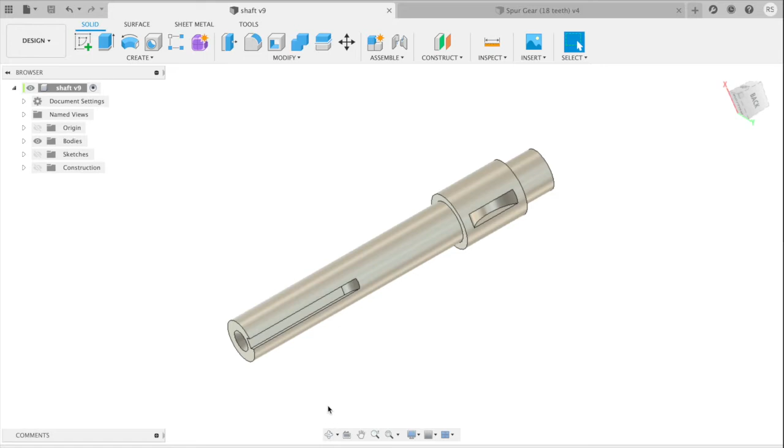Welcome back to the second part of the Multicam CNC router pinion shaft repair.

Today we'll be remaking the shaft and changing the keyways. Rather than using the roll pin, we'll go with a straight key and a woodruff key in the knurled portion.

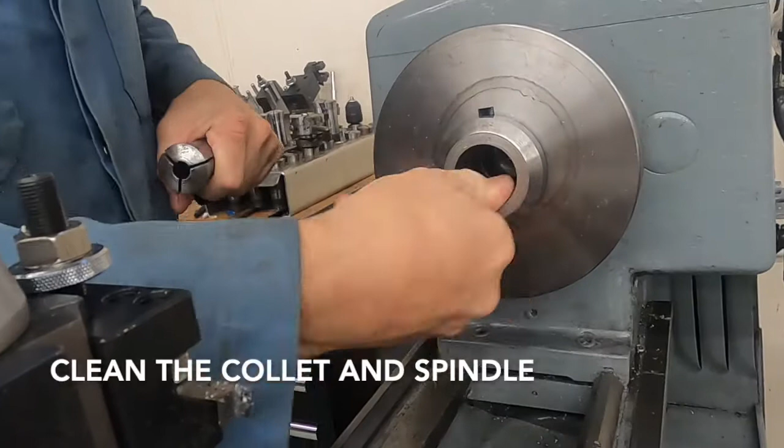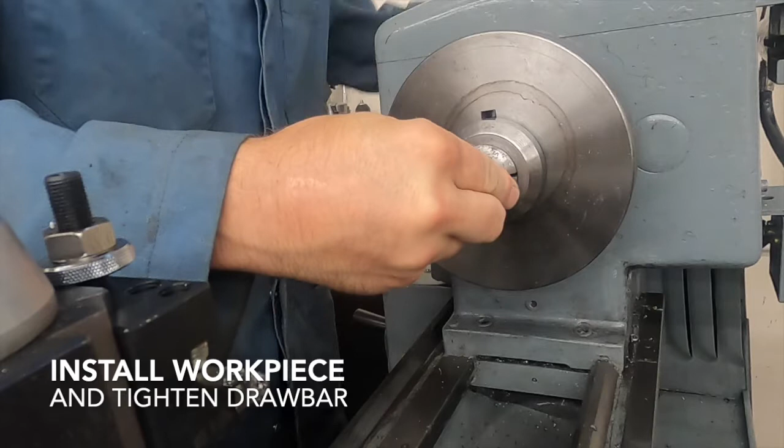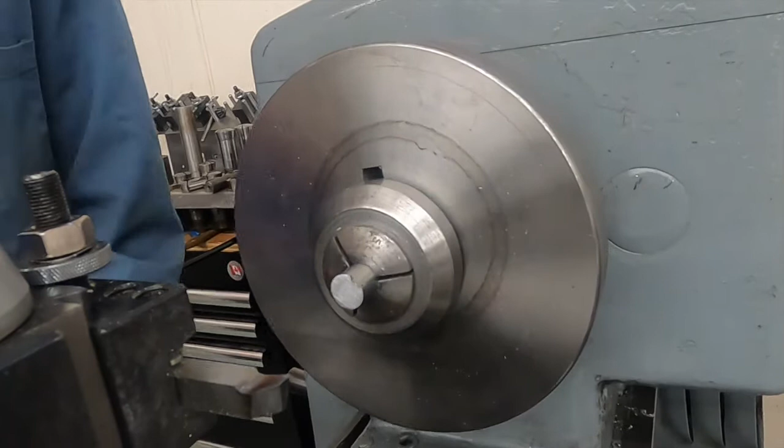The finished part will be 3 inches long, so I started with a slightly longer piece of 1/2 inch 17-4 stainless steel and installed it in a 1/2 inch collet on the manual lathe. Like most lathe operations, we'll start out by facing the stock in preparation to center drill it.

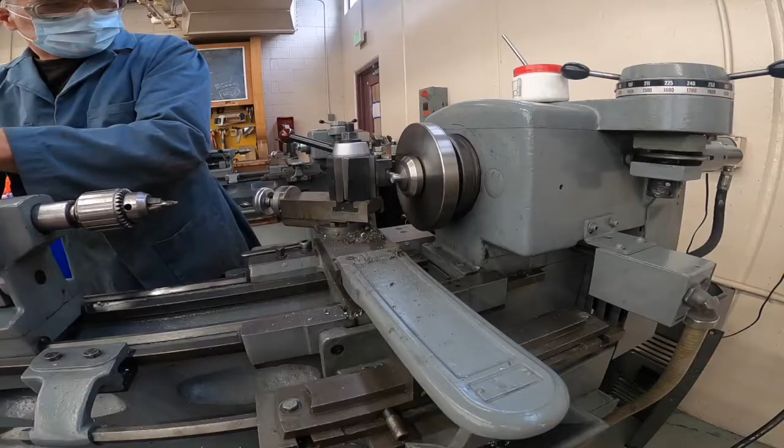This part will be held between centers for the grinding operation, so we'll need to drill a 60-degree center in each end. Here I am putting the first center into the part.

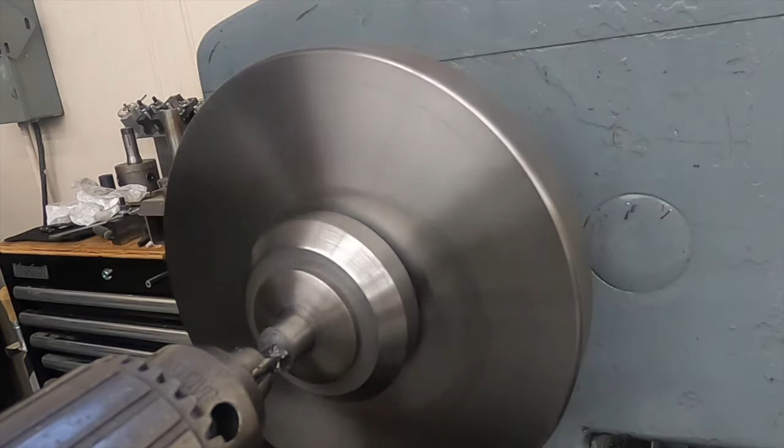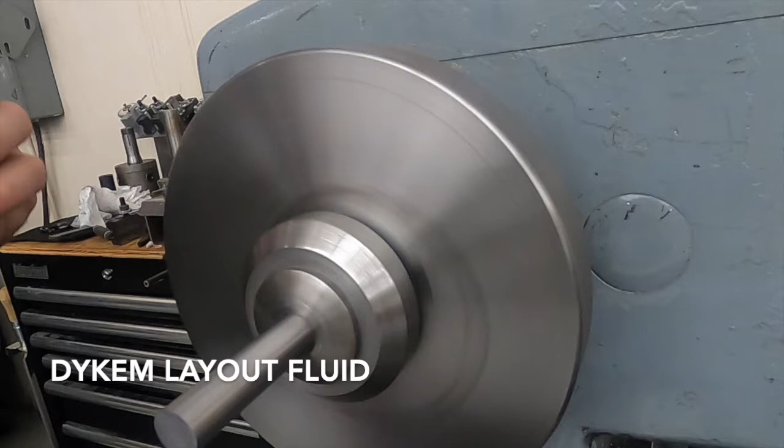Next, flip the part around and leave some material sticking out. This end will be coated with a thin coating of dykem, and this will allow us to scribe the final length so that we can face off this other end and get a good length.

Over on the surface plate, I've set the height gauge to 3 inches, and I'm scribing a line. I'm using a V-block to hold the part straight.

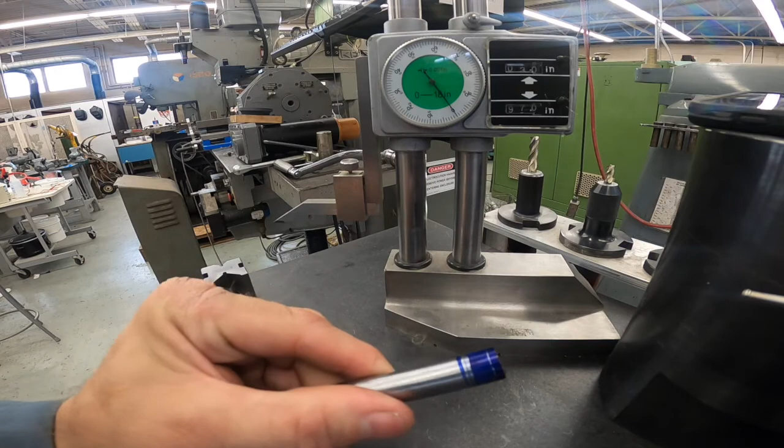Back over on the lathe, I'm going to remove the excess material, face it off to the line, and then I'll center drill it.

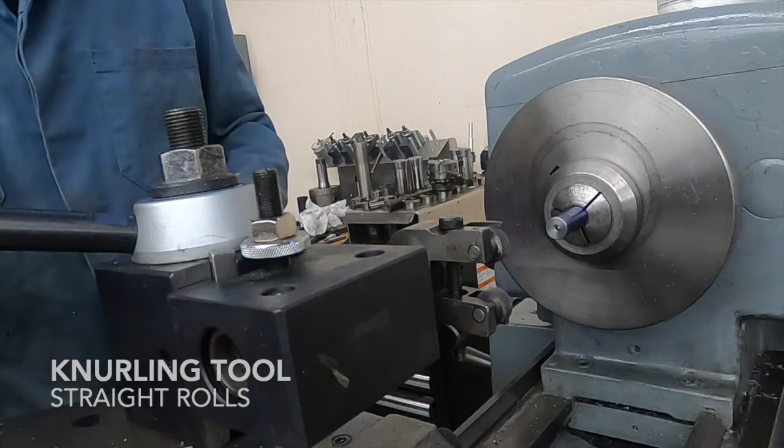Extend the stock about 1.5 inches in preparation for knurling. Even though the knurled portion is only about 5/8 of an inch, we're going to knurl the first 1.25 inches roughly. We'll over knurl it, and then we'll machine off the excess knurl.

By over knurling, this ensures that we have a clean knurled area where the knurls will be well formed, nice and sharp and clean. By knurling a larger area, we can get the knurl adjusted and make sure that everything is absolutely spot on perfect.

The knurling tool doesn't actually cut the knurls, but rather it forms them through plastic deformation. The pressure between the rolls causes the ductile material to change shape, forming the knurled shape, or in this case, the straight knurls.

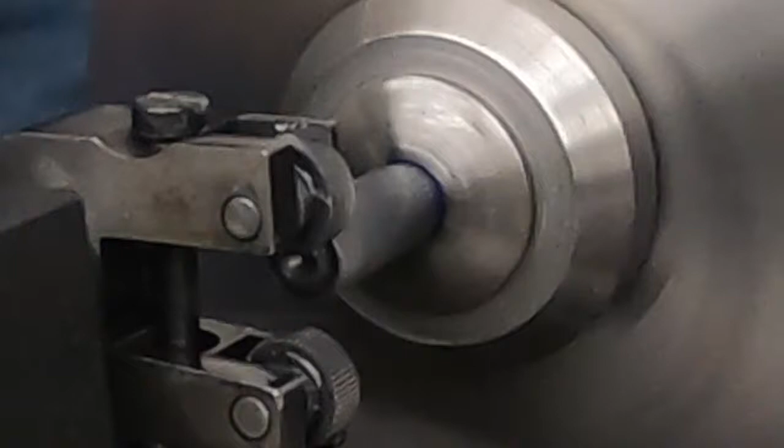Because of the extreme pressures exerted upon the material during the knurling process, an oil is used. Here, after cleaning off the oil, we get our first glimpse at the finished knurls, nice and sharp.

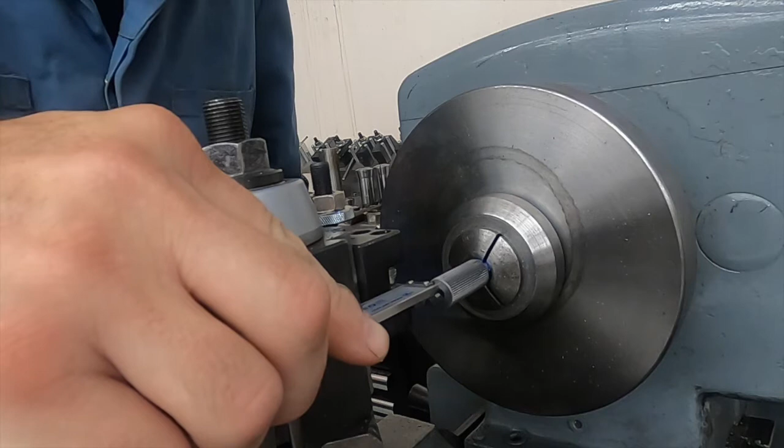Next, I'm going to use a straight grooving tool to cut the bearing shoulder. This does 2 things for me in the turning process. One, it provides a nice flat bearing surface, but two, it'll provide me with a reference so when I'm machining this end, I will know where to stop.

The grooving tool is like a cutoff tool or a parting tool. It just goes straight in and cuts a groove. Following that, we'll come and reduce this diameter down to 7/16.

The bar is then flipped around, and the collet is changed out for a 7/16 collet. All of these collets are 5C style, and they come in a variety of sizes, typically in 1/16 or 1/32 increments. Here we're going to hold the part up against the shoulder and support it with a tailstock for the turning of the main body.

I started roughing down the body and then decided that I should probably cut in my shoulder, and so I cut in the shoulder and then finished off the main roughing operation.

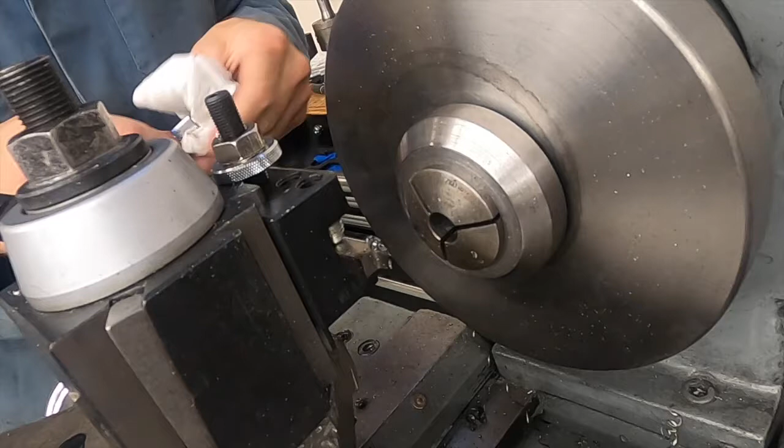As I get closer to final dimension, I switch from calipers to a micrometer for better accuracy, and I finished the part.

I think 5 thousandths oversized. I wanted enough that after heat treat it could be ground. So here I am just finishing off the final end.

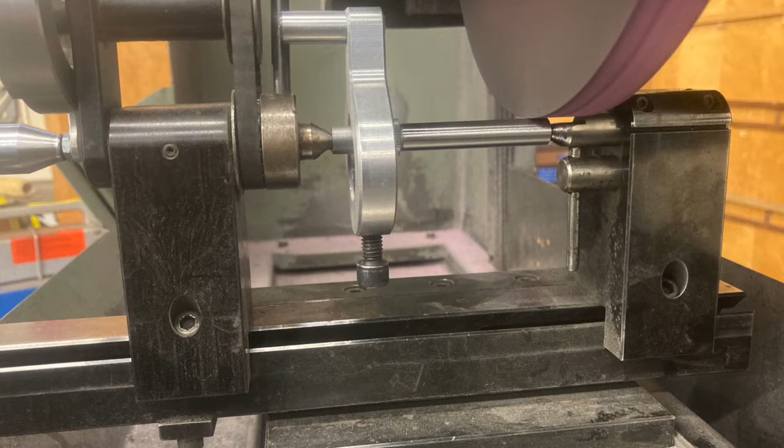Being oversized, it was a little bit snug in the collet, but it pulled out okay. After giving it a quick inspection, I took it over to the surface grinder and I cut that 5 thousandths down to 2.5 thousandths in preparation for cutting the keyway.

Cutting the keyway on this little shaft required a fixture, and so here's a quick design that will allow me to hold the part.

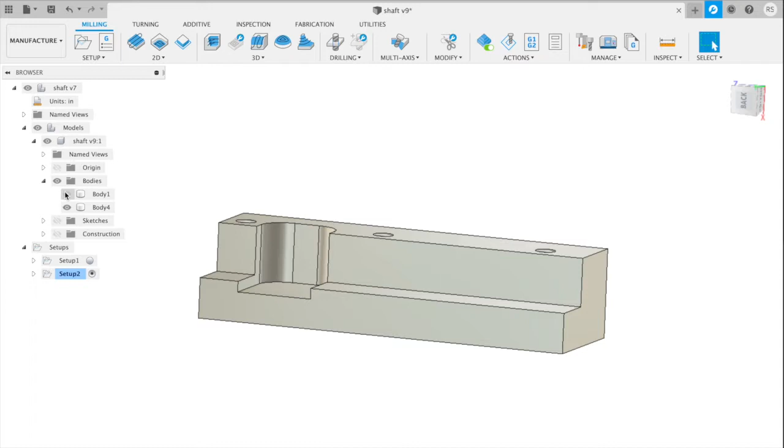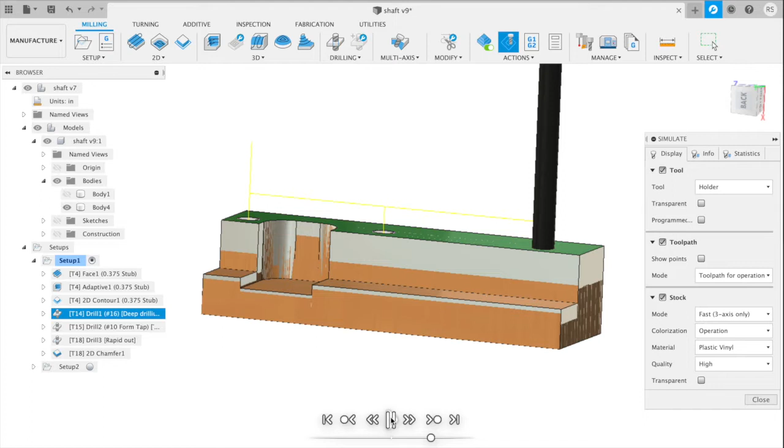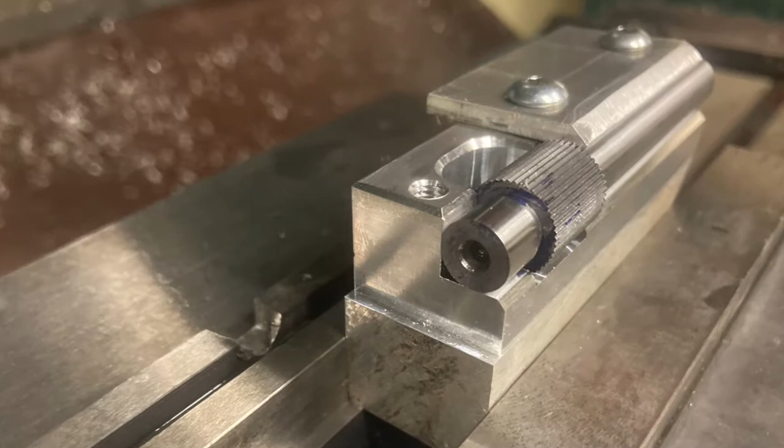The part will be machined out of just a piece of scrap. Here we are just facing off the part, followed by an adaptive clear, which is a roughing operation. Once the part is roughed down to the final dimension, it's contoured, drilled, and then tapped and chamfered. It doesn't take that long, but having a fixture like this makes it really easy to cut these features on this little teeny shaft.

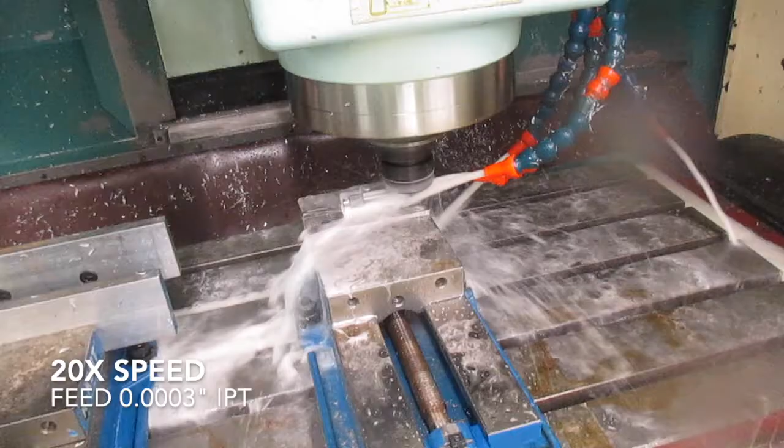The 1-inch straight key slot was cut with a 303 cutter, and the woodruff key was cut with a 404. A 303 is 3/32 by 3/8, and the 404 is 1/8 by 1/2.

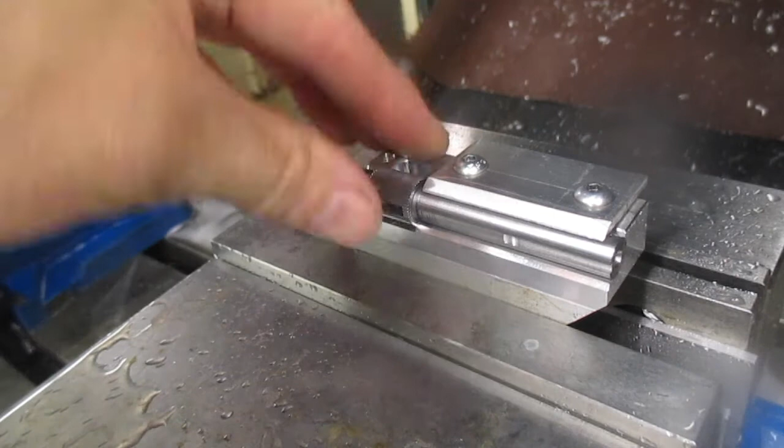Here's the finished shaft with the keys cut into it, ready to be heat treated. The fixture worked out great, and I'm very happy with it.

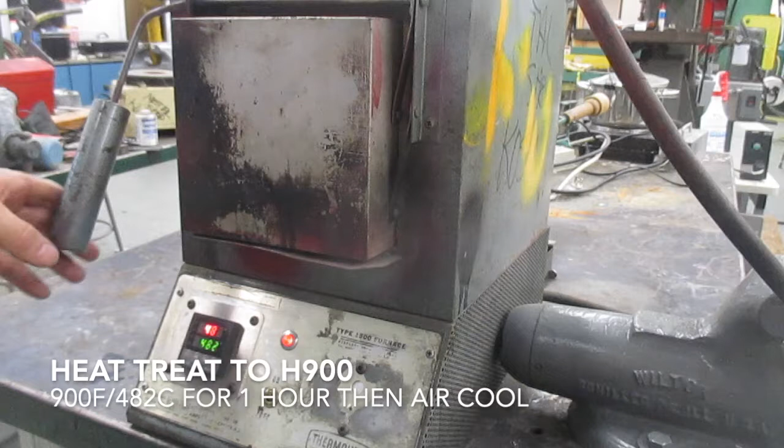This shaft was made from 17-4 pH stainless steel, and it heat treats at 900 degrees Fahrenheit or 480 degrees Celsius for 1 hour to what's called H900, its hardest state. It's then air-cooled to room temperature. When finished, it should have an oxide layer that's even and brown like this.

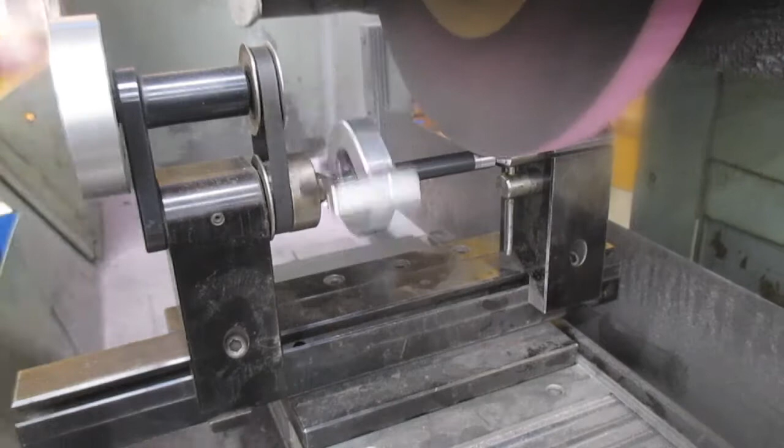Type 630 stainless steel, more commonly known as 17-4 pH, or simply 17-4, is a grade of martensitic precipitation hardened stainless steel. It contains approximately 15 to 17.5% chromium, 3 to 5% nickel, and 3 to 5% copper. The name comes from the chemical makeup, approximately 17% chromium and 4% nickel, thus 17-4 pH stainless steel.

Here I'm just finishing up the final grind of the part to its final dimension in preparation for reinstallation in the machine. You can see it turned out absolutely beautiful, wonderful.

I used the arbor press to press the shaft, knurled portion, and the woodruff key carefully into the pulley. Turned out great.

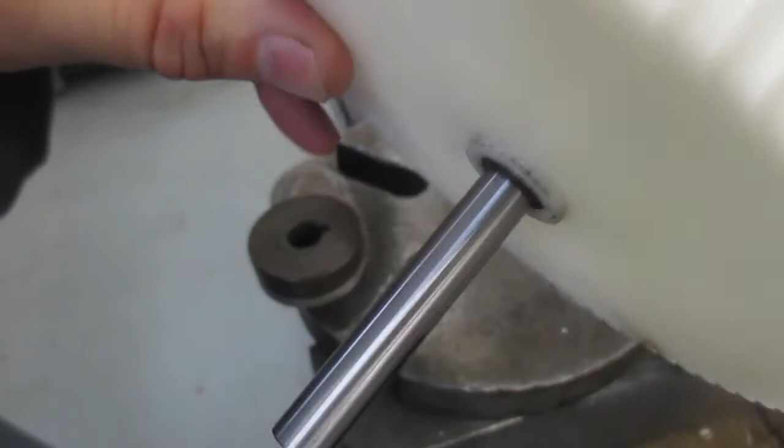I ordered an exact replacement of the original pinion and then decided to modify it with a straight key and 2 set screws 90 degrees apart.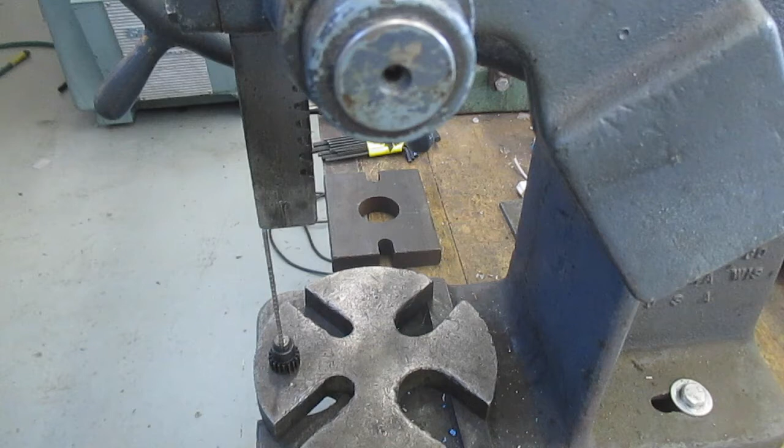It started by needing to broach the 3/32 key into the pinion. So here I am at the arbor press, getting it prepped in the bushing, and carefully getting it started. Broaching actually requires you to go pass through the part twice.

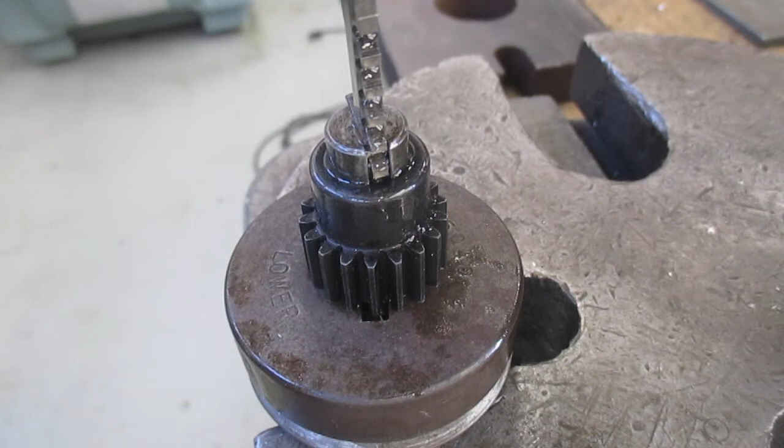On the second pass I would use a shim. I didn't record everything on the broaching process, but here it gives you an idea of what it looks like through the process.

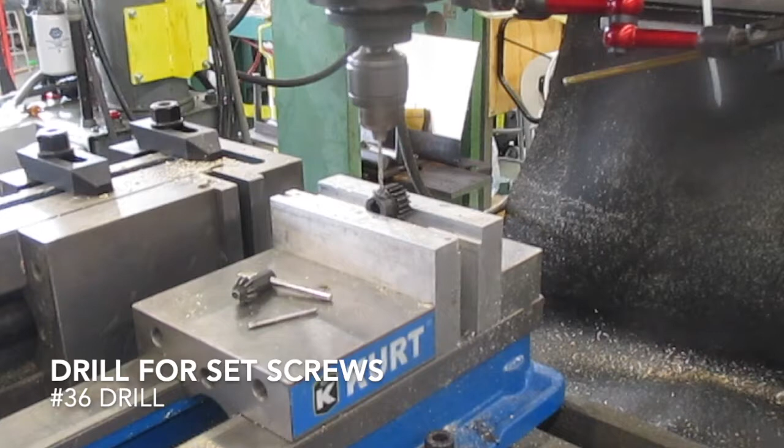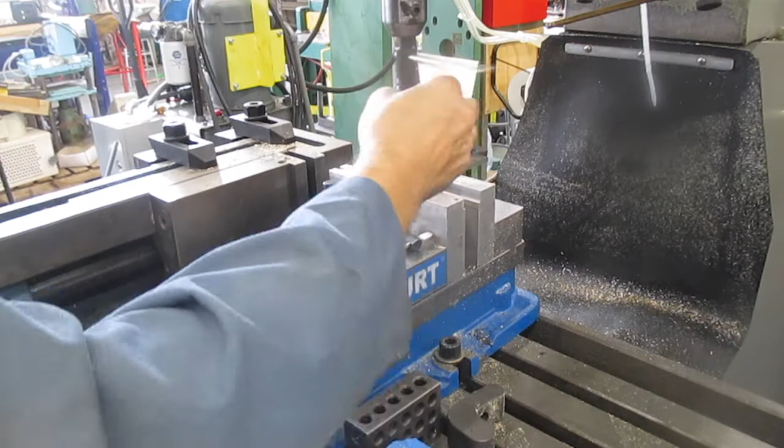The pinion was then drilled with a number 36 drill and tapped for the number 6-32 screw, done above the key and then also turned at 90 degrees.

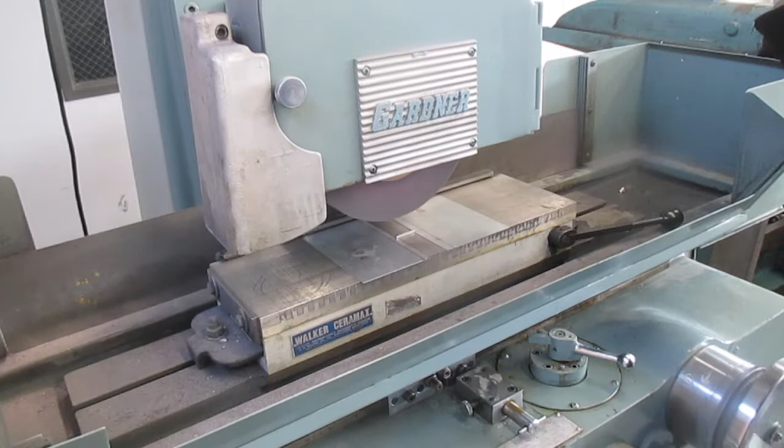I didn't have the key of the correct thickness on hand, so I simply took an oversized chunk of key stock and put it on the surface grinder and whittled it down to shape. I'm using the sheet metal to hold it in place. Didn't take very long.

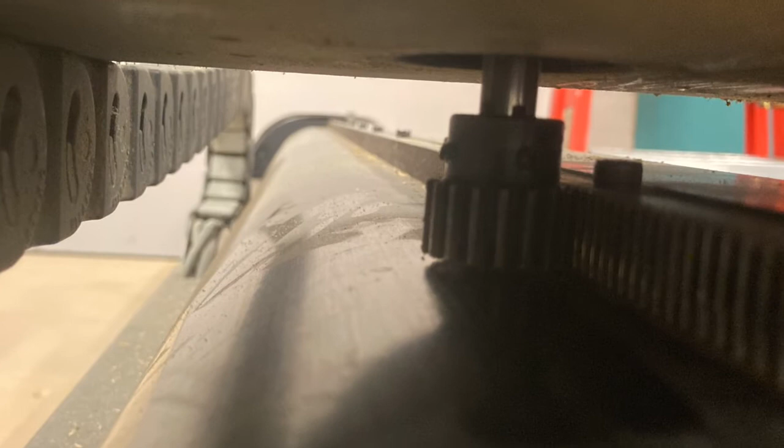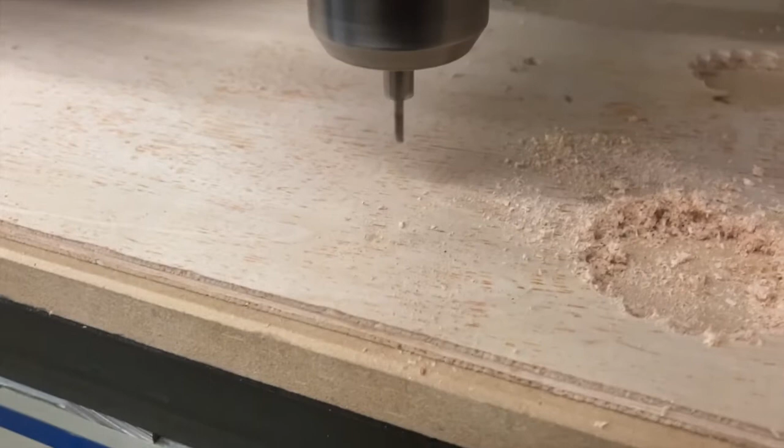As soon as I had the key done, we promptly reassembled the gearbox and put it back on the machine. I took a couple pictures to show you what it looks like in operation, but I didn't get any of the assembly portion. At the end of the day, honestly, I just wanted to get it done and go home.

But we did make a test cut. The test cut looks really promising. The hole went in, it looks round, looking good. I think we've solved our problem.

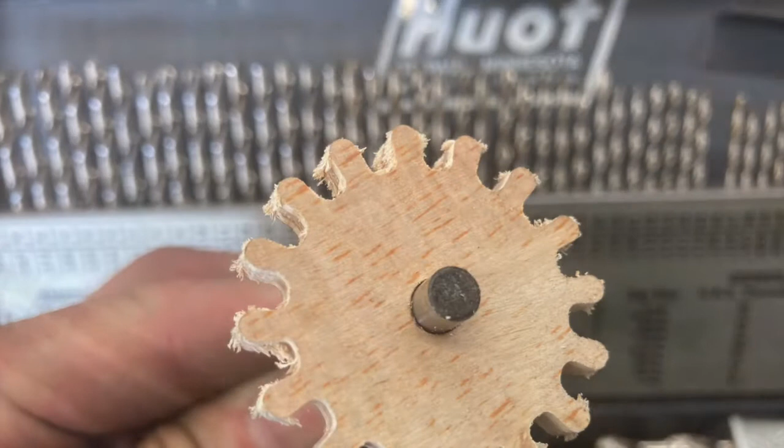Sometimes it's hard to tell in wood because of the fibers, but a 6mm drill fit through the hole. It's definitely a lot better.